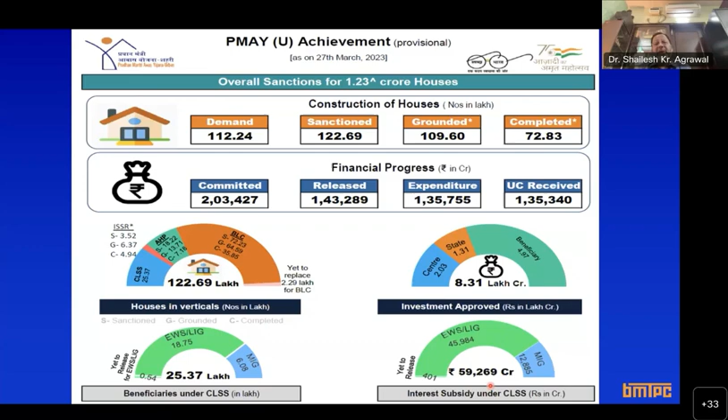Just to give you figures of Pradhan Mantri Awas Yojana, the validated demand given by the states in 2015 was 1.12 crore houses. That was the urban housing shortage in the EWS sector, economically weaker section, or poorest of the poor. Right now we have sanctioned 1.23 crore houses, out of which 72.83 lakh houses have already been completed and handed over to beneficiaries, and around 1 crore houses have been grounded. Out of these, 16 lakh houses are being constructed with these new technologies. Sometimes questions are asked, are we reducing the use of cement or steel? We are using cement and steel, but we are using them efficiently.

When we talk about construction system, a natural question comes to everybody's mind: what is a construction system? There are two things, dear friends. One is material: cement, concrete, or building elements like brick, blocks, or a panel. But a construction system is the system which helps in transferring the load of the building to the foundation. The structural system is called the construction system. We are trying to replace the conventional construction system with an innovative construction system.

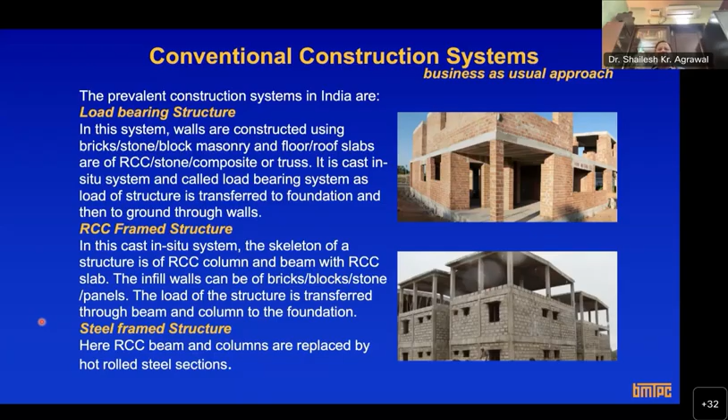There are a number of technology providers, contractors, agencies who are into this. And also the good news is that Government of India, for the first time, proactively, is not only promoting but implementing these innovative systems in their own projects, including CPWD. So I think through this slide I have made it clear that we are trying to replace existing cast in situ frame construction by innovative construction systems, which is basically a load carrying structural system of your building.

Also, most of you know about this, but let me tell you that there is too much dependency on cement, aggregate, and water. All of you know water is scarce. Then fine aggregate, sand. Some states have already banned the use of sand. Tamil Nadu, if you go, you don't get sand there. Instead of that, you have to use quarry dust and all. And similarly, water. So we don't say don't use cement, aggregate, steel, but use them efficiently.

And all of us know that when we do cast in situ construction, how the water is being used, how aggregates, how the mix is being done. So there might be wastage of these materials. So once we manufacture the material components in the factory, you can optimally use these materials. So I don't say that don't use these materials.

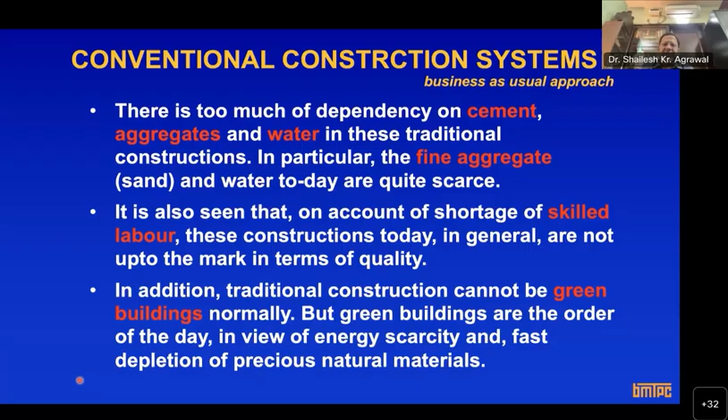some of these things. And as I told you earlier, speed is one of the most important criteria if we want our country to be a developed country by 2047. We want to build a new young India, and with the kind of urbanization, we have to introduce these fast track construction systems in the construction industry. Also, as I already covered, primarily these systems which I'm talking about are fast track construction systems.

All of you know that most of the projects, sometimes for want of material, because of scarcity of labor, because of inclement weather, struggle with time overrun and cost overrun. Once the project is delayed, the cost is also escalated. So these cast in situ construction systems are slow track construction systems, and we need to introduce this fast track construction system.

Also, this is just a slide on green. Every time we are talking about green building, sustainability, and all. So I thought I will put a slide for all of you to make you understand what is green, and why, how do we incorporate green aspects when we talk about new technologies or when we talk about a project. So first and foremost thing is resource efficiency.

In no way do we say don't use cement, steel, all these materials, but use them efficiently. And how can you use them efficiently? Once you produce or manufacture these components under controlled conditions. So resource efficiency, or make use of some waste material like fly ash, slag. In the projects which I will be discussing with you, when we are using precast concrete, we are using fly ash, or sometimes GGBS and other supplementary cementitious material, which not only enhance the durability of concrete but enhance the strength and other things also.

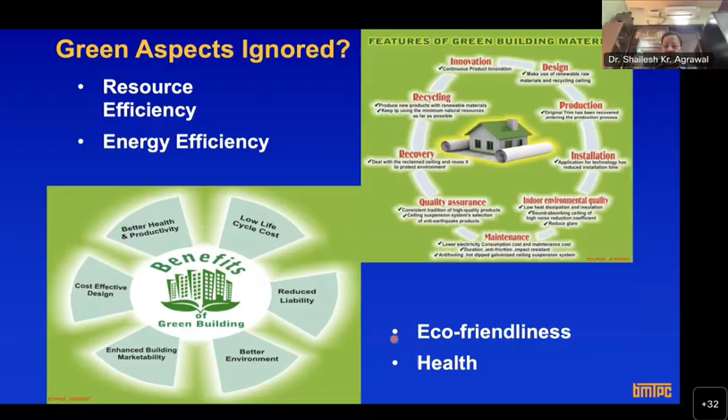This is again a very interesting slide to show you that buildings consume 40% of precious energy sources, 25% of potable water. All of us know that in construction, for curing, we require potable water, or drinking water. So 25% of fresh water is being consumed by buildings during construction, and 40% of natural resources. All of you know cement, steel, all of these are based on natural resources, cement on limestone, steel on iron ore. So buildings consume a major percentage of these precious resources, whether it is energy, water, or natural resources.

And if you look at the bottommost portion, at the same time as they consume so much of precious resources, building activities contribute 50% to air pollution, 42% of greenhouse gas emission, 50% of water pollution, and 48% of solid waste. And all of you know that India is signatory to the Paris Agreement, COP 21, COP 26, and as signatory to these agreements' climate mitigation strategies, India is committed by 2070 to have zero emissions. Why I'm telling you this is because the construction sector is one of the biggest contributors to these greenhouse gas emissions. As you can see here, 42%.

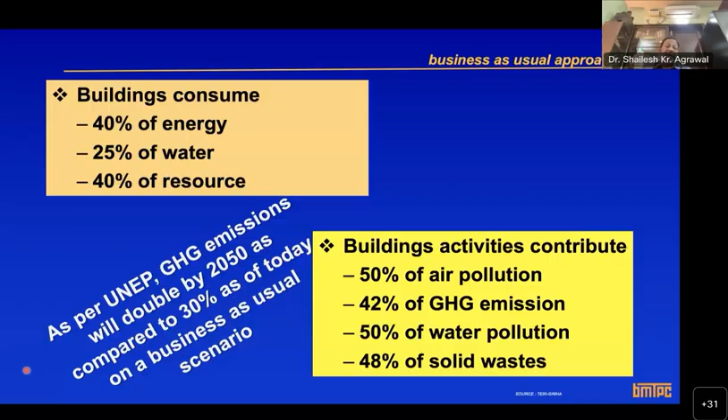There was a report from the UN which says that if we continue with business as usual - meaning if we continue to use load bearing brick construction or cast-in-situ frame construction - our greenhouse gas emissions through the construction sector will get doubled. So we need to reduce that.

So why do we require these innovative, emerging technologies - you can call them new, emerging, innovative, or sustainable technologies? First and foremost is speed. In addition to cost, speed plays a very important role in deciding the construction system, material, and project attributes. Keep in mind the time of completion.

All of us know about the Parliament building - beforehand it was decided it has to be completed within a certain span. Similarly for projects, this is very important if we want resource efficiency and want to save on cost. If you complete the project within a stipulated time, you save on a lot of things, and it has a direct impact on environment, energy, and other factors. So speed is very important.

Quality cannot be compromised, and all of you will agree with me - doing construction at the site versus off-site, there is a whole lot of difference. Once you industrialize or mechanize construction activities, you have better control on quality, you can assure good quality, and you get a good quality product. Quality is again related to greenhouse gas emission, maintenance, cost, and efficiency.

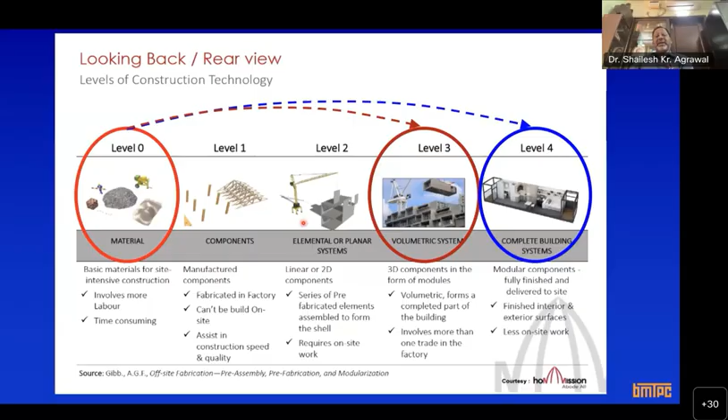Some of you might be knowing, for example, DDA has constructed more than 60,000 houses in Delhi itself with level 2 technologies, where in a casting yard, building components are made. You all know that for bridges, metros, and big infrastructure projects, we use precast technologies, and that precast can be used gainfully in the residential sector as well. A lot of houses are being made with this level 2 and also level 3 and level 4.

There is another very interesting terminology knocking at the Indian construction sector: DFMA. When we talk about construction, what comes to mind? We think of a contractor who will come and construct. We give him material, or ask him to bring the material, and then he does the construction.

Nowadays, agencies are available which are called DFMA agencies, and DFMA stands for Design for Manufacture and Assembly. As per your project requirements and site, these agencies will entirely conceive your project, set up a plant and machinery, manufacture the building components there, assemble your building, and then go away with the plant. They are called specialized DFMA agencies. The entire project, including plant, machinery, and everything, will be conceived by them. In times to come, instead of a contractor, you will look for a DFMA agency if you want to use these innovative technologies.

They will set up a plant near your site, or if your site is near the factory, you can take the material from the factory. Otherwise, at a casting yard, they will set up plant and machinery, and once the project is over, they will take away that plant. So I thought I would introduce you to this term, replacing the word contractor with DFMA, Design for Manufacture and Assembly.

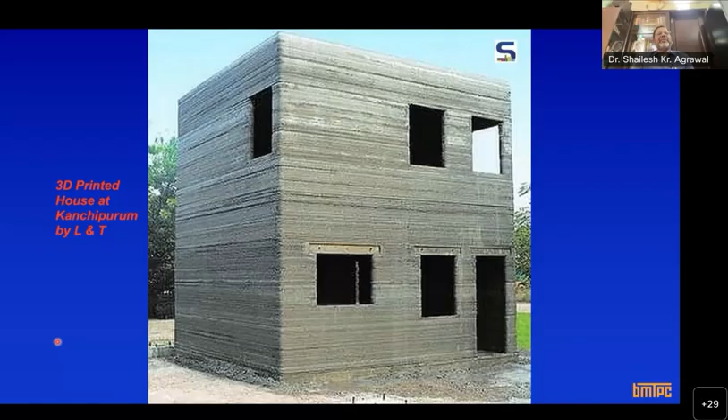So this was the background of the new technologies and the terms associated with them, and what do we require - why do we require these technologies. Now let me briefly introduce these technologies to you. As I told you, all these categories we have categorized like this, so it is not sacrosanct - it is just for better understanding and comprehension. We have given the names, and each category will be explained to you in detail from tomorrow onwards.

But today I will briefly introduce all of them to you. So I've given a name: engineered formwork system - this will be explained to you day after. Then stay-in-place formwork system, sandwich panel systems, cold form or light gauge steel structural system, then steel structural system, and then precast concrete construction system. The precast concrete construction system category has been divided into two: one is 3D volumetric, where the entire module is made, as I explained, or otherwise you make 2D or linear elements and then assemble them at site. So each day, one category will be explained to you.

Before that, let me tell you that whenever we deliver these lectures, a lot of questions are asked: Sir, are we compromising on quality? What about time? What about cost of construction? So let me tell you, for any new technologies we have in fact created a technical framework to evaluate these new technologies as compared to conventional ones. At no point of time are these innovative technologies inferior to conventional as far as quality, time and cost are concerned.

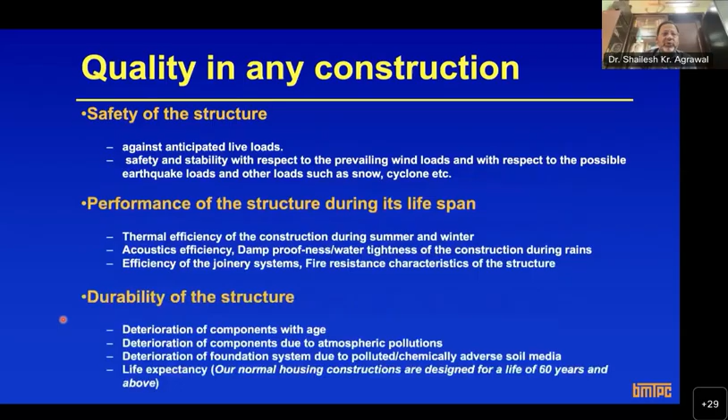Then, traditional construction, as I told you, one is quality, then another is time. When we talk about time or speed, traditional construction is a slow track construction and not amenable for mass housing projects. Because of undue time taken, most of the projects are caught with time overrun and cost overrun. And once your project is into time and cost overrun, a lot of overheads are added, and there is a whole lot of wastage, not only in terms of human resources, but in terms of material as well. So speed of construction is the need of the hour.

Also, it has become essential to go in for faster construction in order to meet the heavy demand and to cut wastages and overheads. So you all agree with me, speed is one of the important criteria to decide the technology to be used. And this is just a slide to show you that the most common question which comes to our minds is, what is the cost? The cost can also be reduced considerably once the technology is mainstream. You can see these economies of scale. Economies of scale play an important role while deciding the costs.

Let me explain economies of scale, because most of these technologies are based on factory setup. Let me give you an example: suppose you set up a plant for manufacturing one shirt or 100 shirts. If you produce one shirt or 100 shirts, the factory setup is the same. So if you make 100 shirts, the cost will be equally divided into 100, otherwise it is loaded on one shirt. That is called economies of scale. Similarly, if your project size is bigger, then the cost will be lesser than the conventional cost of construction.

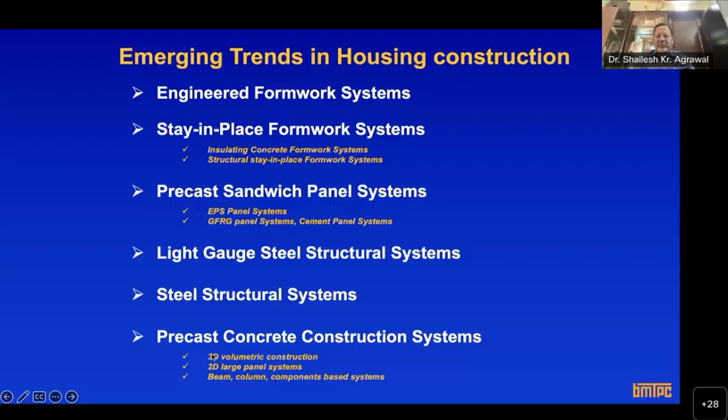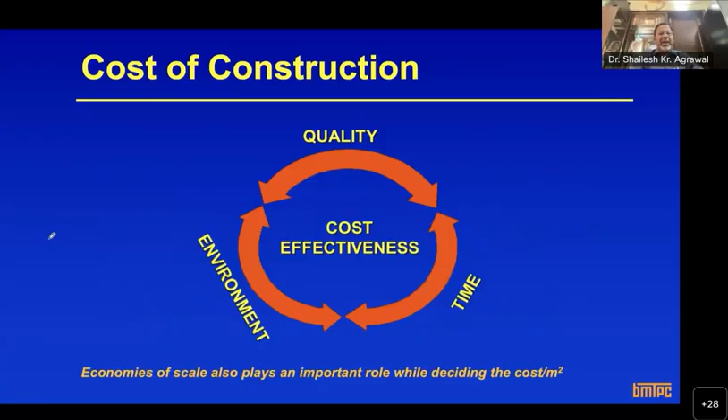And those 54 technologies which we have shortlisted through Global Housing Technology Challenge are also categorized into these 6 broad categories. So steel and this we have clubbed together, and this we have done in 2 categories. I will just explain these one by one through pictures, and anyway from tomorrow onwards you will have a detailed 3-hour lecture on each of these categories. And the blue book which I was talking about is also written in such a fashion that each category is explained in one chapter.

So let's first talk about formwork systems, and we have given it a name, engineered formwork system. All of you being civil engineers, professionals, architects, know about formwork, so there is no need for me to explain what formwork is. Formwork is a temporary or permanent mold which can be of timber, steel, plywood, or wooden plank.

So a whole lot of formwork systems are being used in the country, and this is the conventional or traditional formwork. Nowadays, this formwork can be replaced by aluminum. You might have heard of aluminum formwork system, or a formwork which is made under controlled conditions in the factory. There are manufacturing plants where you make customized, tailor-made formwork suiting your project requirement. So that is called engineered formwork system.

Then we have another 2 kinds of formwork system which I will explain when we talk about that category. So the first category is engineered formwork system, and most of you know this system by Mivan. Mivan is the technology, or alu form or aluminum formwork. And through this picture I am trying to explain what this is.

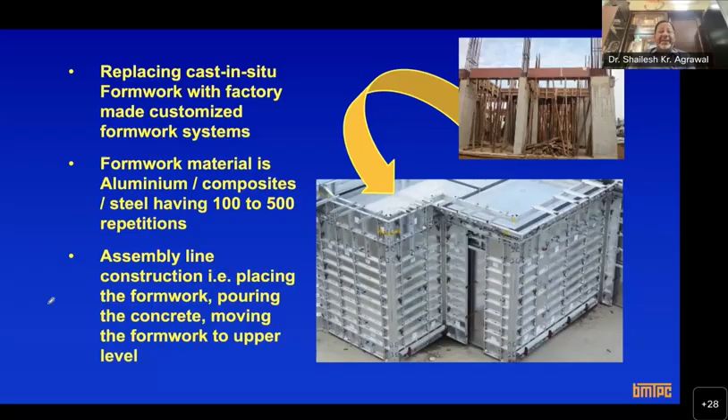Okay, and again, let me show you a few more slides. Again, this is a slide from one of the PMAY sites, as you can see. So what you see here, for the entire layout, first reinforcement is laid, and then the entire formwork is laid. And once the formwork is laid, then you do the concreting, and once you do the concrete, then you can take it to the next floor. So staircase, the sunshades, everything is cast together. So it's a pakka, pure monolithic construction.

Okay, and as you can see here, the conventional mode of construction is RCC frame construction with infill walls. So you make beam, column, and then infill walls. But here, all walls, floors, slabs, stairs together with door, window openings are cast in situ monolithically using specifically custom designed modular formwork, which is normally made of aluminum. And most important thing is appropriate grade of concrete.

Self compacting concrete is being used. I'm not going into detail because there will be 2 lectures on this technology. So you have to use appropriate grade of concrete which gains early strength. It should be self compacting concrete as per design, and it ensures assembly line production. And remember, another thing is this is suited for mass housing.

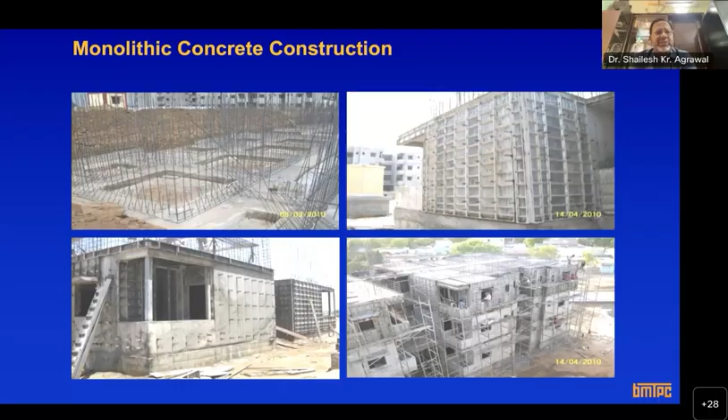You can see this is again a finished mass housing project under PMAY using this. And as I told you, several thousands of houses are being constructed across the country using these technologies, and there are many advantages. There are a number of variants of this technology. This is called tunnel form, and again this will be explained tomorrow. In aluminum formwork we make the formwork for the entire dwelling unit, all the 4 walls. Here only 2 longer walls are cast, so it creates a tunnel kind of thing.

We used this technology in one of our lighthouse projects in Rajkot, which I will be showing you, and that project was completed in record time. In Rajkot we used tunnel form, and the building is G plus 13, a 14-story building, and each floor had 8 dwelling units. The entire skeleton, tunnel form along with slab, was cast in 45 days. We did that in Pradhan Mantri Awas Yojana under the Lighthouse project, and the project has already been handed over to the beneficiaries.

So tunnel form is a mechanized system for cellular structure. It is based on 2 inverted L forms. It creates a tunnel with slab, and for the remaining outer walls you can have infill walls or a sandwich panel kind of system. Here wall and slabs are cast in the form of a tunnel, leaving 2 sides open, whereas in monolithic concrete construction with aluminum formwork, the entire room is cast in a single pour. I hope you understood this. So this is faster, and a lot of people have used this technology.

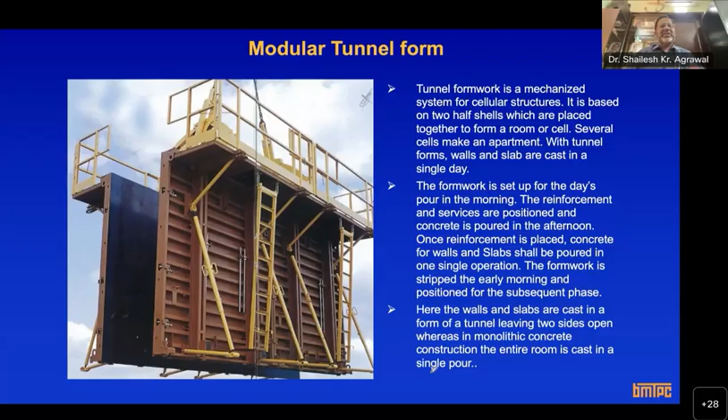Okay, so this is the first formwork system. So here, what you see, this is a typical formwork system which is customized, made in the factory. And once the casting is done, you remove this formwork and give it back.

There is another kind of formwork which is not removed, but which stays with the structure. Okay, and because it stays with the structure, that is why it is called stay in place formwork system or lost formwork. Some of you might be knowing lost formwork system, so this is called stay in place. I have given it the name stay in place. It is also known as lost formwork or sacrificial formwork system.

And this formwork system again is of two types. One is insulated concrete formwork. If the formwork acts as an insulation, then it is called insulated formwork system. If it acts as a part of structure, as a part of reinforcement, then it is called a structural stay in place formwork system. Okay, and I will show you through pictures. I'll try to explain you through pictures.

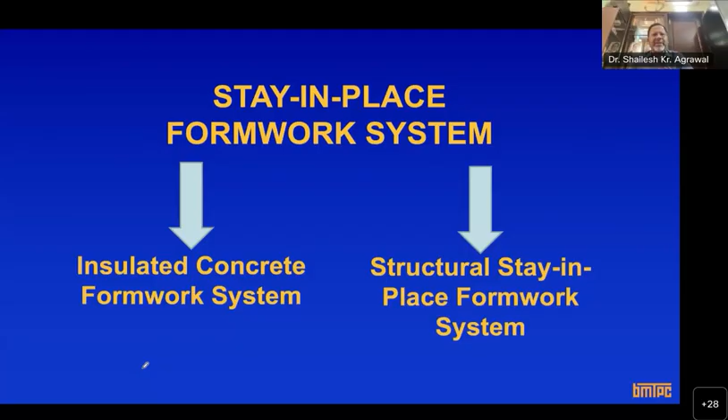Okay, so let me just explain you. So there are two types. First formwork system was engineered formwork system, aluminum formwork. This is stay in place or lost formwork system. So if it acts as an insulation, then it is called ICF, insulated concrete form. So this is like this. So here, all of you know, this is a typical framed and infill wall construction. How about replacing these walls by this kind of formwork?

So this whiter element which you see is expanded polystyrene. Expanded polystyrene, if you are not able to understand, is nothing but a treated thermocol of higher density. The density of thermocol is 1 to 5 kg per meter cube, but this has density more than 15 kg per meter cube. Okay, and its industry name is expanded polystyrene. Okay, so this is this formwork.

So you get these kind of blocks made in the factory, and then two men can insert this and create an entire wall, and then, depending upon your project size, depending upon the design, you can insert the reinforcement and then do the shotcreting. You can fill the cavity with concrete or with lightweight concrete, or, depending upon your structural requirement, keep it without any concrete, and then do the shotcreting from both the sides.

Okay, so this acts first as a formwork system, and then it stays with the structure, and later, because it is expanded polystyrene, it acts as an insulation, and that is why it is called insulated concrete formwork system. So we are replacing cast in situ formwork by this factory made expanded polystyrene formwork system, and this is called sacrificial formwork or lost formwork. Means formwork is left in the structural system to later act as an insulation layer. So there are several companies in our country who are into this kind of formwork system. You can see any joint.

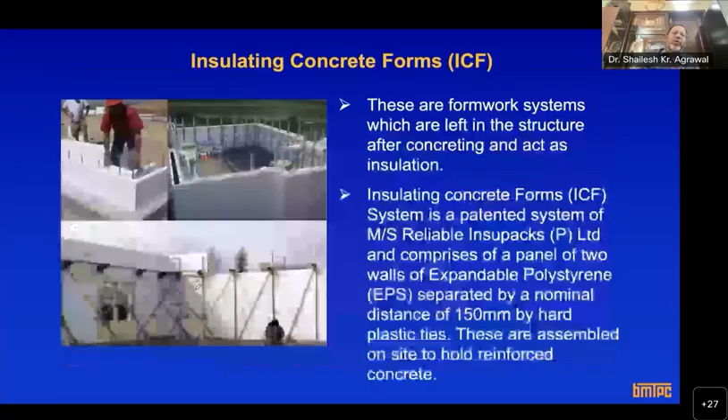As you can see, as per your project requirement, all these elements - corner element, anything - you can have curvilinear, column, T, C, corner joints. All these are manufactured in the factory, and they are separated through that black thing, which is a plastic tie. Then they are assembled at site and have tongue and groove, slip and lock arrangement. Through tongue and groove you create the entire thing, and then do the concreting from both sides.

This system consists of two layers of modules, that is expanded polystyrene - this white thing - separated by hard ties. These modules are interlocking, as I told you, tongue and groove kind of system. They are interlocking modular units, dry stacked over the already laid plinth, and then filled with cast-in-situ concrete. The units lock together and create a form of structural walls.

They can be used as a slab, even for a staircase slab, even for sunshade - they can be used for any application. Then you do the shotcreting. When cured, the wall supports the structural loads from floors and roofs, and the shuttering, because it stays in the structure, provides thermal insulation. As I told you, you can put reinforcement in between the cavities as per your requirement. So this was about ICF.

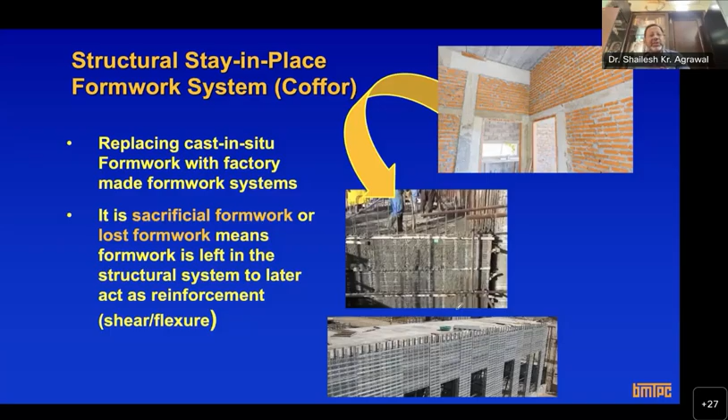You can see here, it is like this. Again, Coffor is the name of the company manufacturing this formwork. It is customized as per your requirement. These Coffor panels are made in the factory and then brought to your site. This formwork system can be used as a load bearing system, so there is no need to have beam columns - you can just erect these panels, which are galvanized. I will show you.

So these are galvanized plain steel sheets with a mesh, a rib lath, reinforced by C profile GP sheets as vertical stiffener. I'll show you another slide. Then these grids are further connected by MS rebars.

So this is a panel which is made in the factory, and then over a plinth you put this and then do the concreting. Here you require a sticky, less flowable concrete, and then you do the concreting and then the plaster. So this first acts as a formwork, and then later it acts as structural steel.

After the erection of formwork panels in alignments, corners, edges for doors and windows, rebar positioning is placed, then concrete of required grade is poured, and once the concreting is done, the walls can be finished with plaster.

So this is simple, and again these walls can be thinner because you are using this formwork, and this is a galvanized sheet. So it's nothing but galvanized plain sheets. This panel is made, and this technology has been included.

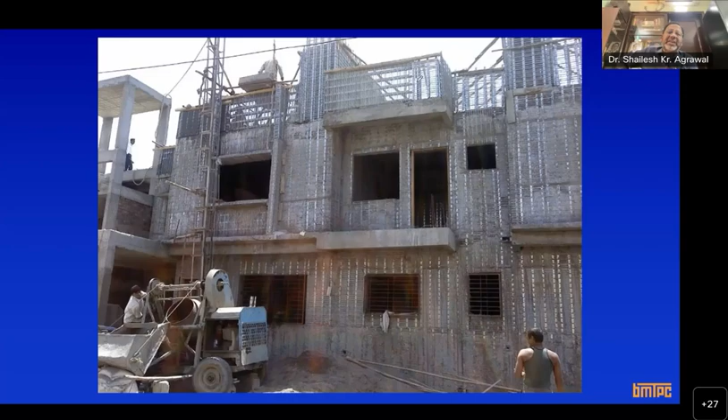As per your requirement, you can have as many stories as you want. If you want more stories, you can put the reinforcement, you can increase the thickness of these panels, and these panels are galvanized panels, erected like this. Panels are brought from the factory, and then you do the concreting.

And there are other agencies, as I told you, for lost formwork systems, there are other formwork systems available. Lost formwork, you can see here, what we have is fiber cement boards. There will be a detailed lecture on the sandwich panel system, but I just wanted to show you, introduce you to this technology.

So fiber cement board on both sides, and they are connected together by these stiffeners, called high impact molded inserts, or spacers. Through these spacers they are connected together.

You can have this fiber cement board in 6mm, 8mm or 10mm thickness, and then they are just dry stacked at the side, coming in suitable width and height, and through tongue and groove connections they are erected at the side. These panels are erected in situ to produce straight-to-finish panels, so you can create a monolithic structure, and the cavity inside can be filled with suitable grade of concrete depending upon the application.

If you are using it for non-structural application, you can fill it with lightweight concrete, or leave it as it is. Otherwise, if you want to use it as a load bearing panel, you can fill it with concrete. So the basic premise here is that you have these skins or sheathing - outer skins of fiber cement board, or calcium silicate board, or anything - separated by plastic inserts in between.

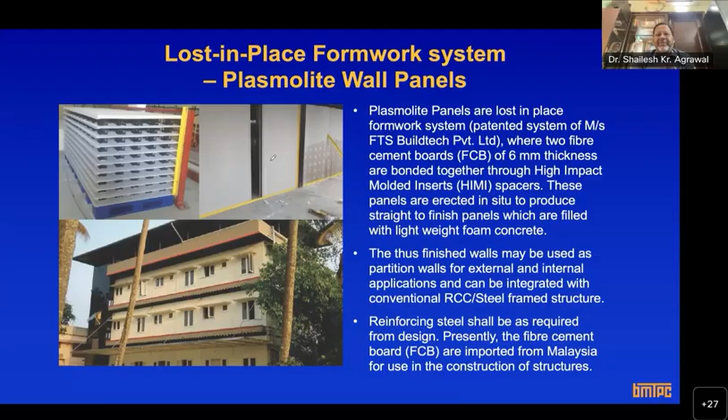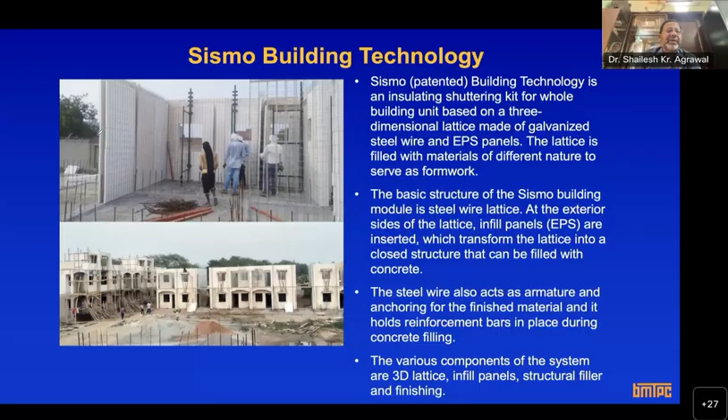Again, the same thing, already explained. This is EPS, expanded polystyrene - the entire panel which is made in the factory. We have used this technology in one of our demonstration housing projects in Lucknow - expanded polystyrene panel with welded wire mesh. I think another slide will show you this.

There is another very interesting technology called stay-in-place PVC wall forms. There will be a detailed lecture on this. This is a wall form which is pre-finished - meaning you can just buy this wall from the factory and erect it. Here the outer sheathing, these outer layers, are of PVC.

This PVC can have different color options - it can be white, it can be gray. You give the order and they will make it in that color, and there is a cavity in between. If you want to use it for load bearing application, fill it with concrete and reinforcement. Otherwise, for partition walls or infill walls, you can use it as it is. This is a pre-finished wall, and this is brand new technology which we are using in one of the lighthouse projects in Lucknow.

That is why it is called PVC wall form. As I told you, these are branded names given by companies. There are two companies in India making these PVC wall forms. PVC, as all of us know, is polyvinyl chloride. So the finish is PVC, and in between there is a cavity, as you can see.

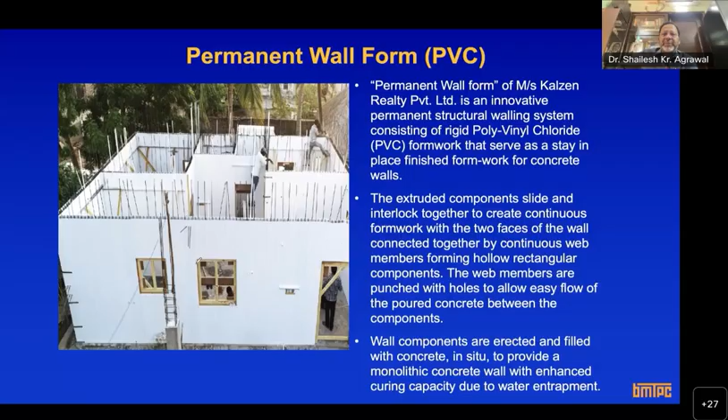A specific component for corners is manufactured in the factory. So as per your requirement, these corner elements and T elements are made, and then erected on the already laid plinth. In between you can insert reinforcement, because it has cavities from both sides - vertical as well as horizontal. So you can put horizontal as well as vertical reinforcement, and once the walls are erected, they are filled with concrete in situ to provide a monolithic concrete wall. There is another technology.

Again, there will be a lecture, so I'm skipping this GFRG, glass fiber reinforced gypsum wall technology. Again, this is one of the indigenous technologies. This technology came from Australia earlier, but then IIT Madras along with BMTPC did a lot of research on this, and this is based on a waste material which is phosphogypsum. So phosphogypsum is a byproduct of a fertilizer plant, and from that these panels are being made, and these are called GFRG, or glass fiber reinforced gypsum walls.

So tomorrow the first lecture will be on this technology by Professor Meher Prasad. So I'm not going into details of this. Again, this is a wall panel made from a waste material which is phosphogypsum, and it can be used as a slab, as a load bearing wall panel. Okay, you can see this, again he will show you.

So you can see, this panel comes like this with the cavities. You can fill these cavities, alternate cavities as per your design with the reinforcement and concrete. You can use it for laying the slab as well. So every third cavity is cut, and you can put a reinforcement and cast a beam there. Okay, this I'm not explaining.

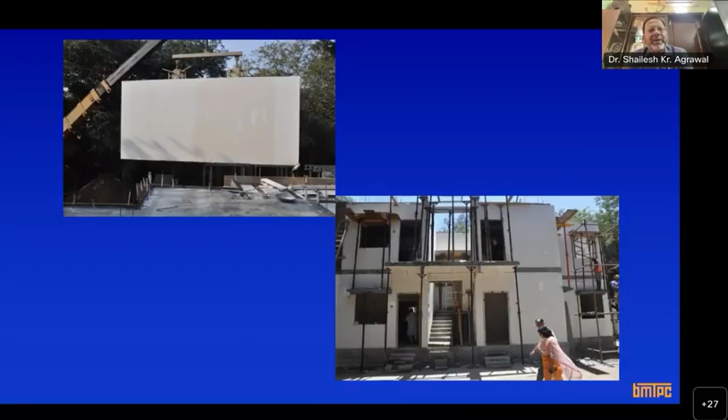So this is the panel you can see. So this panel comes of this form. So for the entire room, okay, this comes, and this is 3 meter wide. It's lightweight because it's hollow, and then it is inserted on an already laid plinth. These are the pictures from a guest house which was constructed in IIT Chennai. Okay, so I'm not going into detail of this GFRG because this will be explained to you tomorrow.

Then let's move to the next category. So far I have explained you two categories. One was engineered formwork or shear wall construction on aluminum formwork. Then another category I explained you, which was stay in place formwork, where formwork is not removed, but it is left in the structure to be part of structure. So if it is part of structure, either it acts as an insulation, or it acts as a part of structure. If it acts as a part of structure, then it is structural stay in place formwork system. If it acts as an insulation, then it's called insulated concrete formwork system.

Now let's move to another very exciting category, which is dry wall construction, and it is known as prefabricated sandwich panel system. Okay, so again, sandwich panel system. Why is it called sandwich panel system? Because there is a softer core which is sandwiched between two outer layers. Those two outer layers can be fiber cement board, calcium silicate boards, MgO board. It can be AAC panel. Okay, so Aerocon panel you might be knowing. So you can have that kind of panel.

So there is a softer inner core, and then you have wythes or sheathing, or you can call it skin. So outer skin 6 mm, 9 mm fiber cement board. That is why it is called sandwich panel system. So a softer core is sandwiched between two skins or two sheathings. That is why it is called sandwich panel.

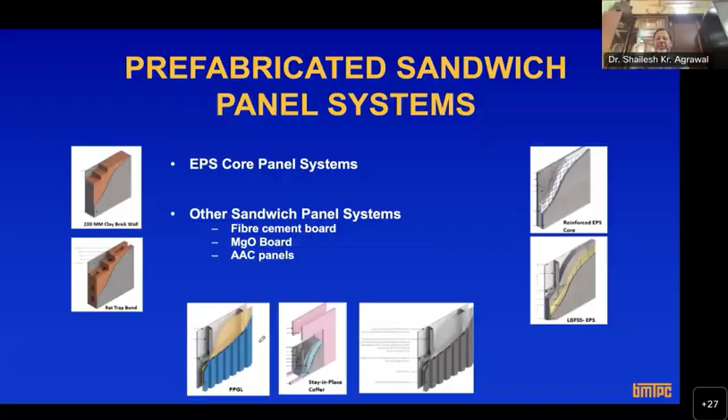So instead of PUF, you have expanded polystyrene, and instead of these profile sheets, you can have fiber cement board, calcium silicate board, AAC panel, or anything else. Or otherwise, you can have an EPS panel, and on both sides you can do the shotcreting. So in general, it is called sandwich panel system. Okay, and I will just show you through pictures. You can see here. So replacing brick and mortar walls with these dry customized walls made in the factory.

So this entire wall with cuttings, you can create these openings at the site, or they can be customized and cut at the site. So instead of brick, you can have this kind of panel. And as I told you, these panels come in a variety of ways: EPS panels or other kinds of sandwich panel system. And there are a number of companies.

Everest is making it. Then Hyderabad Industries. There are a number of companies who are making these panels, and all these panels come in a variety of ways, and they can be single layered or double layered. I will show you pictures. Okay, so first is EPS core panel, which is also very popular. As I told you, EPS is nothing but treated thermocol of higher density, and this is the panel.

You can see this. So this is called EPS core panel system. Again, a detailed SOR of this has already been issued by CPWD. So what you see here, this is the core. So this is a softer core which is of EPS. Then you have welded wire mesh on both sides, and these two welded wire meshes are connected together through stiffeners.

So these two welded wire meshes create a space truss like thing, which helps in load transfer, or which helps in bearing the load of the structure. So this can be used as a load bearing wall panel, and since it is of EPS, it is called EPS core panel system. So core is of EPS, both sides it is galvanized welded wire mesh, which is interconnected through stiffeners, and then you can do the shotcreting from both the sides.

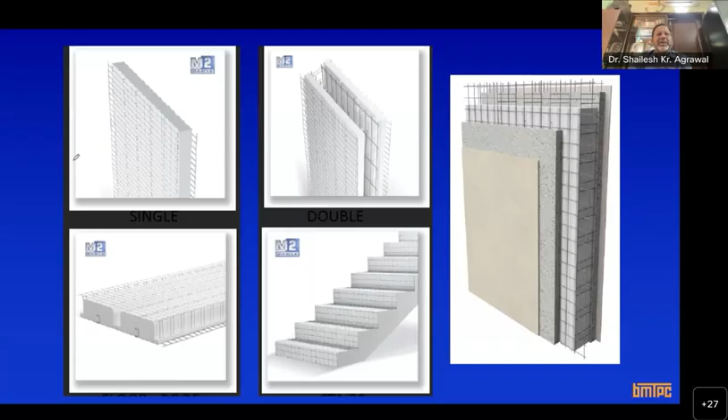We have used this in several demonstration housing projects. Right now, we are doing a project in Jammu where we are making 40 dwelling units using this EPS core panel system. There will be a detailed lecture on this technology as well for all of you. So I think you understood this EPS core panel system, and these are customized, branded technologies. So there are a number of companies, and they give them their own names.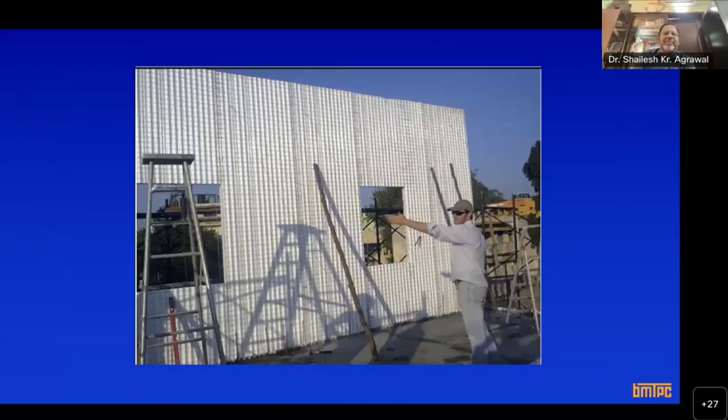So there is a company M2 Emmedue which calls it Advanced Building System Panel System. So you can see, on an already laid plinth, you have double bars, and then you erect this, and then you cut the opening, you can put the services and all those things here. You can see this is that galvanized welded wire mesh I was talking about, and here is the plinth. Then you leave these double bars, and then you put a C channel, and over that you erect these core panel systems.

And then you can have this kind of shotcreting, and then you can do the plaster. You can see this is being used here as a floor element.

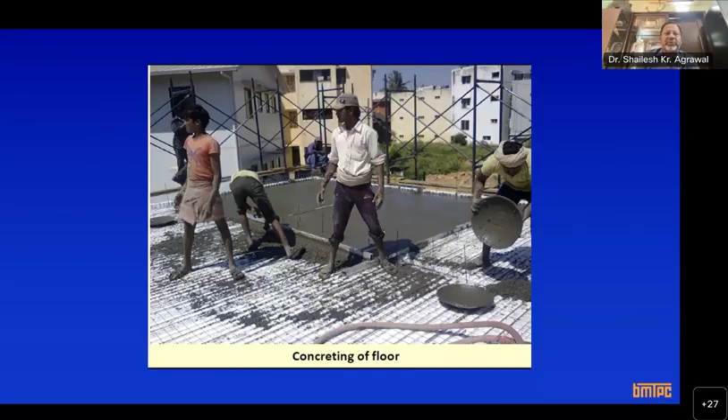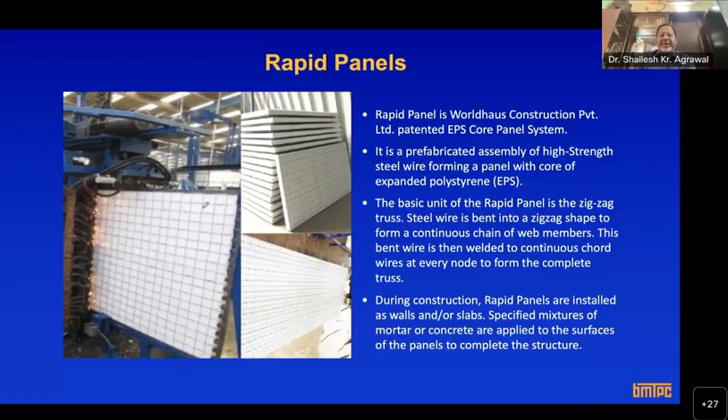There is another company called Worldhaus, which is making these panels with the name Rapid Panels. Okay, so again you can see this is welded wire mesh, two welded wire meshes interconnected through stiffeners, and in between you have a core, that is an expanded polystyrene core. Okay, and as per the project size, these panels are customized and made.

Again, this technology has already been certified by us. It has already been included by CPWD to be used as wall panel, load-bearing or non-load-bearing, and as a slab. As you can see, panels are finished on site by spraying concrete to realize the different structural elements: vertical structural walls, horizontal structural elements, slab floors, or cladding elements. Even sunshades can be made with this. And if you're really interested, you can visit our Jammu project. We are doing a demonstration housing project there.

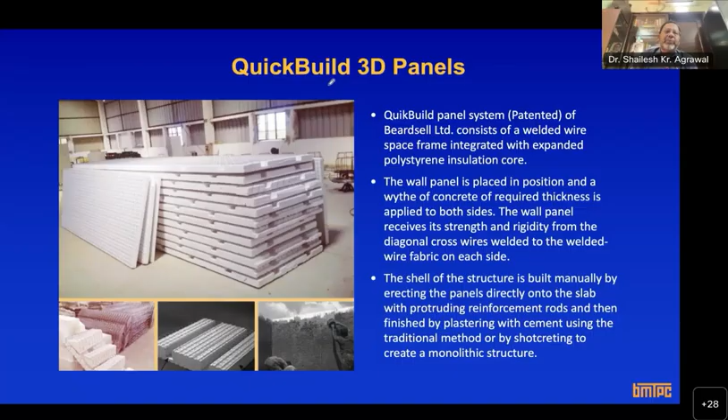Then there is a well-known company, Beardsell. In fact, we are using these Beardsell panels in that Jammu project. It comes with the name Quick Build 3D panels. Okay, then there is Schnell. You might have heard of Schnell India. Schnell is an Italian company which has a patent on this technology, and they normally supply equipment for setting up a manufacturing plant for this EPS panel system. They also have a panel with the name Concrete Wall. So the idea here is just to tell you that there are umpteen companies in India manufacturing these EPS core panel systems.

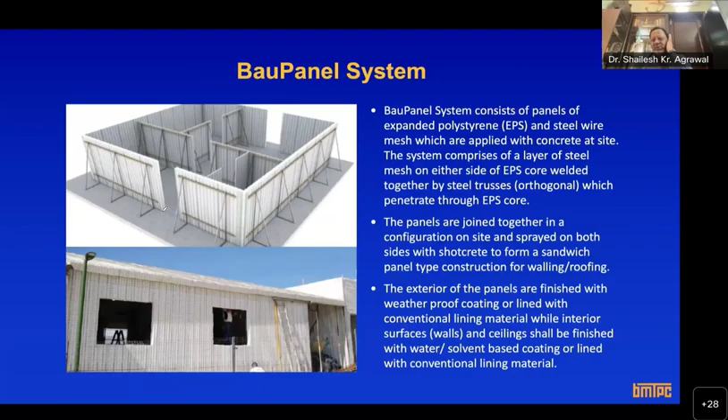Okay, BauPanel, another company from Switzerland, and they all have a setup here in our country, and most of these technologies I'm talking about have already been certified, whether it is M2 or Rapid Panel, Jindal, Beardsell, Concrete Wall of Schnell India, or BauPanel. All of these have been certified by BMTPC under the performance appraisal service. So that was the EPS core panel system.

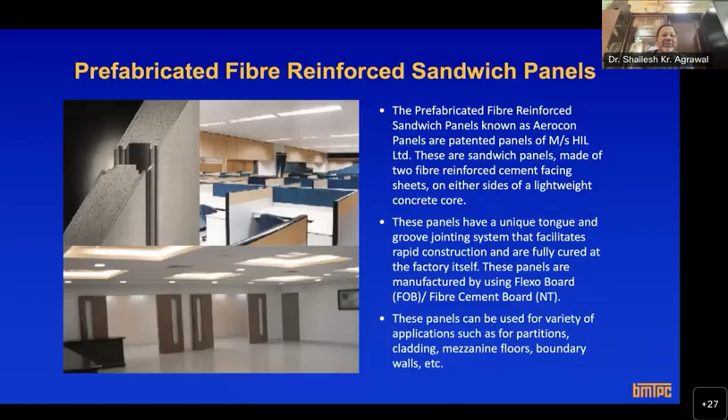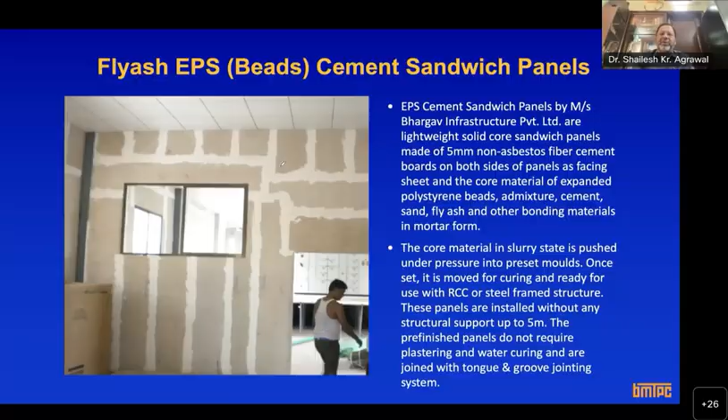So then again, there is another panel. There are two companies who are making this kind of panel. One is Rising Japan. There is another company from Gujarat, Bhargav Infrastructure, which is making this EPS cement sandwich panel system. So EPS cement sandwich panel system means fiber cement board or calcium silicate board on both the sides, and in between you have the EPS aerated concrete, which is made of expanded polystyrene beads, cement, sand, and fly ash.

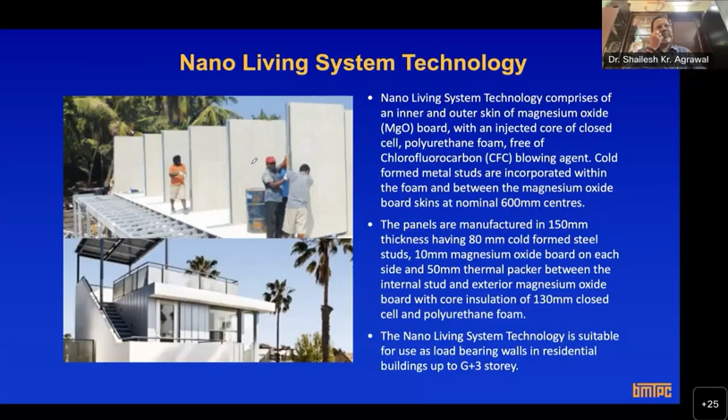Again, the technology is recommended only for 4-story, G plus 3. If you want to use it as a load bearing panel, we have recommended this only up to 4-story structure. So this was the precast sandwich panel system, and as I told you, there will be a specific lecture from a scientist from CBRI who will be discussing in detail about these sandwich panel systems.

Now let's move to the fourth category, which is steel structural system. Dear friends, all of you know that steel is a versatile material and a better material than concrete when it comes to earthquake resistance and making high-rise structures. And we are dedicating 2 sessions.

One entire session on light gauge steel structural system will be taken by a very renowned professor from IIT Hyderabad, who will be talking about light gauge steel structural systems, their equipment, how to design them, how to construct buildings using them, and what kind of infill materials you can use. And there will be 2 lectures by IIT Kharagpur professors, who are basically architects, who will be talking on hot rolled steel structural systems.

Nowadays, steel structural systems have become very popular because the technology has changed. Nowadays we have TMT bars, steel technology has changed, and now we can make built up sections. Remember, earlier we used to have hot rolled steel sections, I girders, channel sections, angle sections. Nowadays we can have hollow built up rectangular sections.

So those hollow built up rectangular sections have opened up a lot of flexibility into the structures, and you can use them for making a whole lot of different kinds of structures, and replace RCC beams and columns by these built up sections.

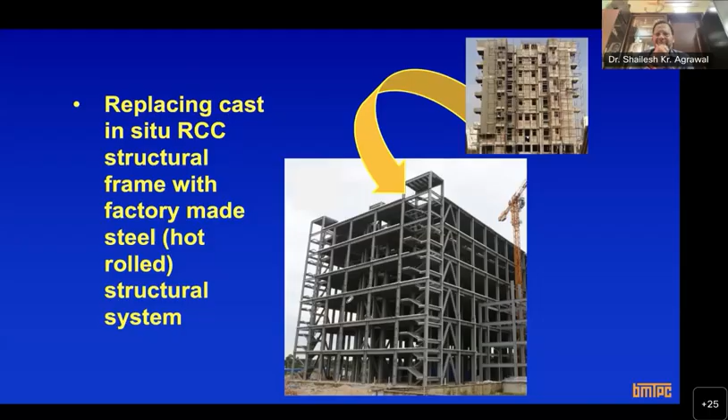So of course there is a whole lot of saving and speed. You can fast track the construction, because instead of making beams and columns and curing, you can just get them manufactured in the factory, put them in place, and then whatever drywall systems I told you about, you can just insert those walls as infill walls here. I think I will show you that as well. So I think you must have got the basic understanding now. There will be a few lectures on this technology as well.

And let me also tell you that whenever we talk about these new technologies, the entire concept is done in a very professional manner. Remember we used to talk about CAD, computer aided design, design and manufacturing and construction. So the entire thing is fed into the computer: your plan, layouts, elevation, the entire design process, and then through your software you get how many components are required and what kind of components are to be fabricated.

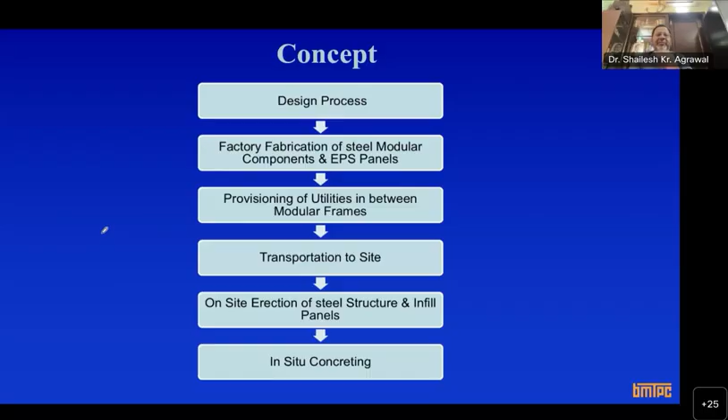So the entire thing is mechanized, automated, and then you fabricate those components in the factory. In the factory itself, you can give the provisions for services and other things, then transport them to the site, and just erect them at the site. So the entire thing is an automated process, right from the concept stage to the construction stage or handing over stage.

You can see this. There is a company called InstaHome. InstaHome means instant homes. So they make the entire thing for you, including finishes and this kind of thing. I'll show you. You can see this. I just wanted to show you this. So, this is what you see.

This is a very interesting 10-story mall, which was constructed in the outskirts of Chandigarh. You all know about Mohali. Mohali is quite famous for a cricket stadium. It's an industrial town in the outskirts of Chandigarh, where this mall was constructed in 48 hours. It was constructed, I think, in 2014, and the entire operation was seen by the then Home Minister.

And the technology was not new. You just can't make it out, but the technology is this. They have used steel beams and columns, and the walls are EPS. You remember I told you about EPS wall panels.

So they have used EPS wall panels here, and they have used steel. By the time you do the foundations, you give the order for beam and column to the steel factory. They will manufacture those beams and columns for you, and then you just bring them to the site with all services, and erect and assemble them, and start using them at the site.

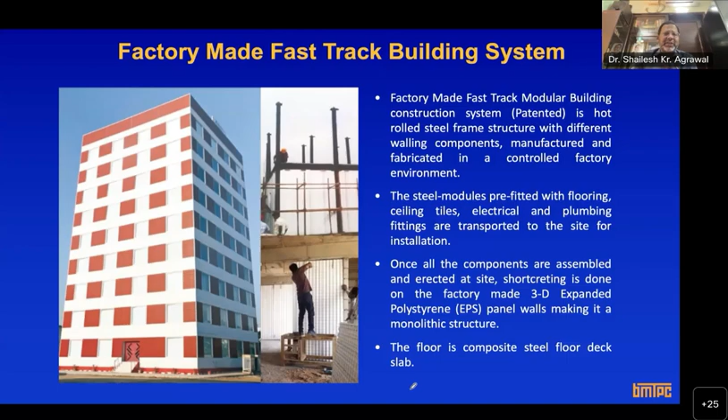Steel behaves quite good in tension as well as compression, so it is quite good for earthquake resistance as well. You can see this for quickly rehabilitating in case of disaster, it can be used for quickly erecting or quickly rehabilitating people.

This is a site near Dehradun. Some officers' mess and other structures for the Ministry of Defense are being made by the same company. So these columns and beams were manufactured in the factory, and then they are putting the EPS. Here the slab is a deck slab, which all of you know - you put a profile sheet, and over this you put a nominal reinforcement, and then you do a screed concrete to create a slab.

In fact, I have used this technology after the Hudhud cyclone. We were asked to give a technology which can quickly rehabilitate the displaced people during the Hudhud cyclone. So this was the technology we gave. These are those examples, you can see these.

This is near Vishakhapatnam, which is a coastal area, so we have given them coating and all. So it's a steel structure with deck sheet, and these are aerocon panels. For infill you can use anything.

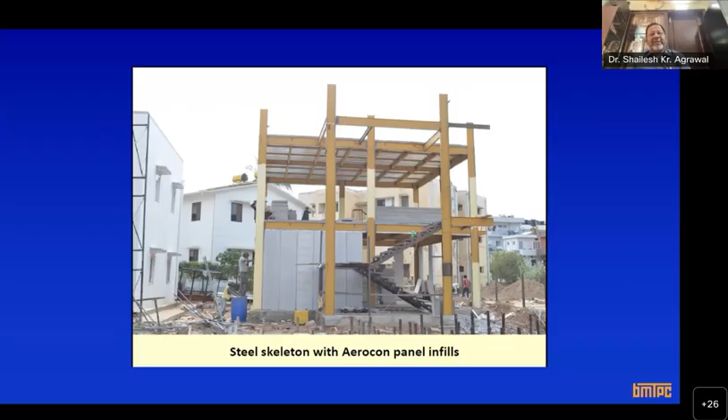So the basic thing is the structural system - the structural system is of steel, the slab is a deck slab, and these walls can be EPS panel, sandwich panel, or puff panel, as per your requirement, as per the utility of your building, and as per the cost available. You can have these infill walls, and this comes out very cheap.

This is for industrial structure - all PUF panel. This is a puff panel where you have this puff, which is a core of polyurethane foam bonded between two PPGI sheets. PPGI sheets are pre-coated GI profile sheets, and in between you have the puff. So mainly for industrial structures, this PUF panel with the steel structural system is being used.

Then there is another, again sandwich panel with puff panel, which can be used. There are a number of companies making it, Hyderabad Industry is one. Let me tell you that during COVID time, most of these panels were used for quickly erecting hospitals and other infrastructure for COVID patients.

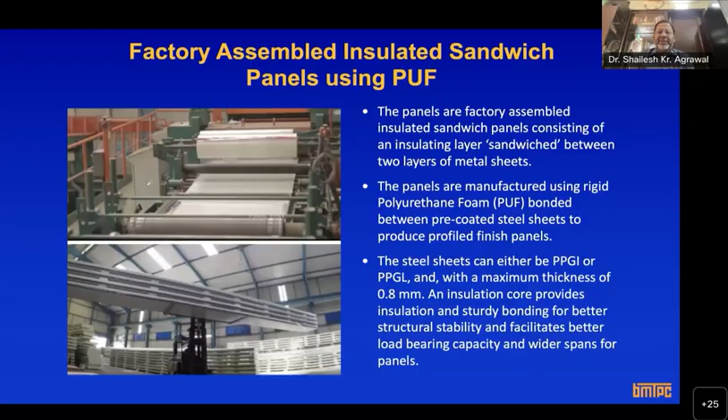Then there is another technology which is light gauge. All of you know steel can be manufactured in two ways - hot rolled steel and cold form steel. Cold form steel is made from galvanized thin steel sheets, put in a press to form different sections to create light gauge steel sections, and these light gauge steel sections can be converted into wall panels and used to make low rise structures up to G+3.

There will be a lecture of 3 hours by a professor from IIT Hyderabad, so I'm not going into detail, I'll just show you a few slides. This is how it is being done - you're replacing, and this is a very popular technology. I will give you an anecdote also on this technology. First let me explain - this RCC frame construction is being replaced by this kind of light gauge structural system.

So they have created an entire township using this light gauge panel. And we have recommended this technology only up to 4 stories. Abroad, in Hong Kong and other places, they are using it for high rise. But looking at our geo hazard profile, we have recommended or certified this technology only for 4 stories.

So the frame is made of cold rolled high strength steel section, and in between this space you can put a fiber cement board or EPS panel, and you can infill it with mineral wool or rock wool. And again, light gauge steel, this has already been included by CPWD. Detailed schedule of rates has also been created for this.

Also for cold form steel, we have a code, long back, IS 800 - all of us know IS 800 is for steel structures. Similarly, IS 801 is the code for cold form steel. It was made long back, and now they are revising it. But cold form steel we didn't use because it was replaced by concrete.

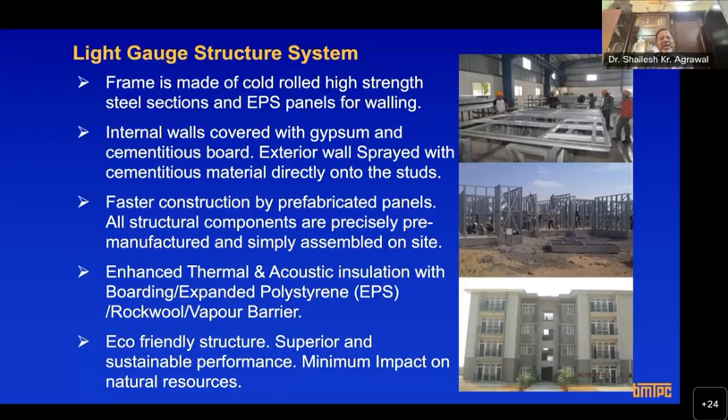So all I wanted to say is that this technology can be used for a variety of applications, and very quickly you can erect this structure without compromising structural and functional performance.

And as I have been telling you, all these technologies are ably supported by computer-aided design software. All sophisticated tools complying to our standards are available. So you can create the entire model - virtual model, 3D model, walk-through model. Everything can be done and suitably designed. And then later it can be given to the fabrication team for fabrication, and then brought to the site for assembly.

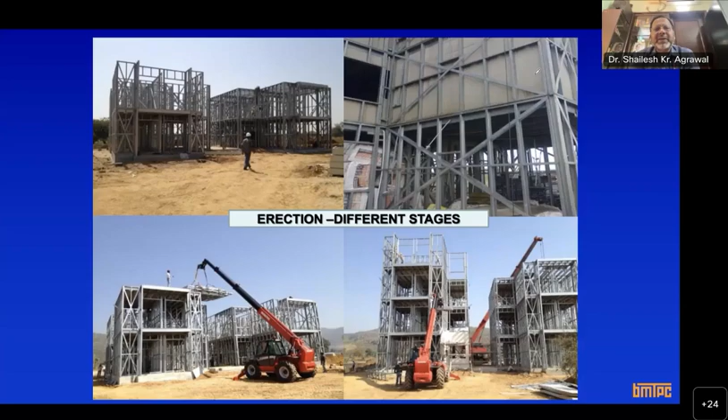So you can see here, this is that light gauge panel I was talking about. They are made in the factory, and on both sides you can see these fiber cement boards, and in between you can put the rock wool or mineral wool with vapor barrier. Or instead of fiber cement board you can put any other board like calcium silicate board, EPS panel, or some agencies are making thin precast concrete panels instead of fiber cement board. So as the company, they can put any kind of sheeting elements.

You can see this - here they are using precast concrete panel. So there are a number of companies, as I was telling you, this is that precast concrete panel. There is a company from Bangalore - they are using light gauge steel frame structure with precast panels, and these precast panels are filled with lightweight concrete.

So in between, you can put rock wool or mineral wool, and if you are not happy with mineral wool or rock wool, you can fill it with lightweight concrete - lightweight concrete you all know. So this was about the steel structural system, and now let's move to the next category, which is the most promising one: precast concrete construction.

Precast concrete construction, again 2 days we will be devoting for this. One day will be on 2D precast, so its entire manufacturing, transportation, design, and joints will be discussed with you in detail.

And the next one day will devote on 3D volumetric construction, where the entire module is made one over the other. We have two very prominent industry experts actually doing this. One has already done the Goa International Airport project, which was recently inaugurated by the Honorable Prime Minister, made with 3D volumetric construction. So we have the CEO of that company delivering a lecture. And another project we are doing in Ranchi with 3D volumetric construction using a company Magicrete of Gujarat, so their CEO will also present on 3D volumetric construction.

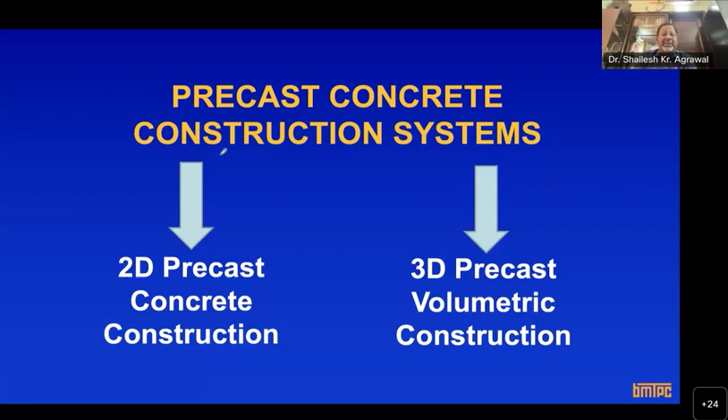Those two lectures are going to be very interesting, so they will explain you in detail. Then we have a scientist from CBRI who will explain the different aspects of 3D volumetric and precast concrete construction. Then we have a professor from IIT Madras who will deliver a lecture on precast concrete construction, its design aspects and other things.

So the basic premise for 2D precast concrete construction is simple, as I explained earlier, that you are replacing beam, column by these kind of components. Any component - it can be beams, columns, wall panels, slab floors, staircase - so replacing your infill walls, beam, column, slab by these precast elements which are customized and made in the factory. These are customized factory-made beams and columns, and then you just assemble them at the site.

And joints - you can ask several questions on joints. There are different kinds of joints. You can have cold joint, wet joint, and these joints are emulative joints, so you can ensure monolithic action between the joints. You can design the joints like that. So in-situ concreting you can do and create a monolithic joint between these precast elements.

Again, these are the elements - they are L&T. They specialize in precast large concrete panel systems. You can see the entire facade, the entire outer wall is precast and made in the casting yard, and just hoisted and placed at the desired location, then connected with other elements. You can see corner joint, L joint, C joint, this kind of joint with openings, without opening, shear walls - everything is done in the casting yard, and then they are installed.

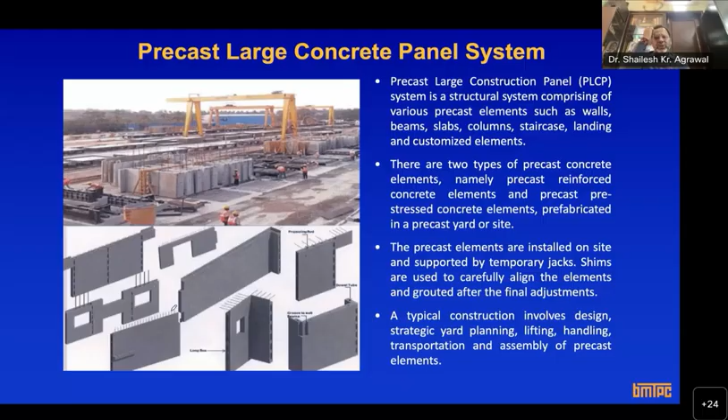Precast elements are installed at the site with temporary jacks and shims, then they are aligned, and then you can do the in-situ concrete at the site. Any element you name - you see staircase. This is the pod element I was talking about, the entire pod element, a toilet block, bath block, or any other, and then just put it in place. This is a solid slab, hollow core slab. You can have parapet, spandrel beam, wall panels - any element you name, you can make and then erect.

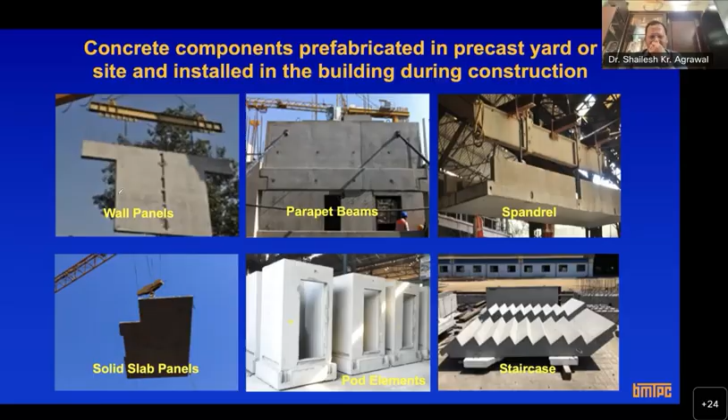All the connection and jointing of various structures are accomplished through in-situ concreting. They call it the 3S system, industrialized 3S system - it's their patented system. They erect beam, column, and partially precast slab, and then do the in-situ concrete, so as to ensure monolithic, continuous, resilient, ductile behavior - monolithic concrete action.

So this is a factory setup, and I will strongly recommend, if you are from Delhi, you should go and visit the casting yard of any precast factory. You go and visit the casting yard. All kinds of sophistication. You will not believe, you don't need to cut the bars and all.

There are machines, automatic machines are available, and you have to just feed in the computer the size of the reinforcement cage, and then you have a reinforcement coil. It will automatically cut the reinforcement and then make the cage for you.

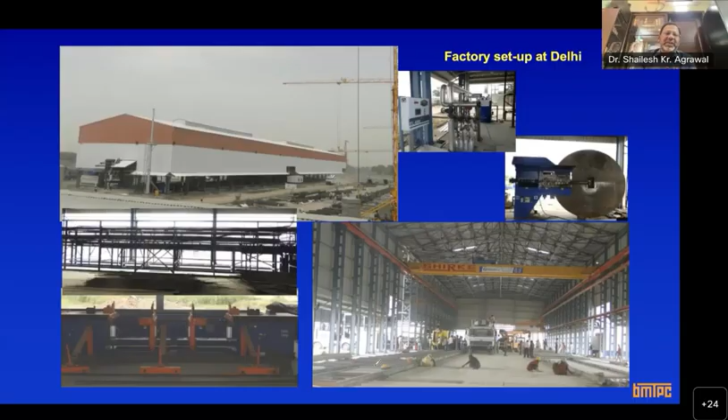Then you have long concrete beds where automated concrete will come, the reinforcement cage will be lowered, then you will cast, and then you will cut those, and you will do the pressurized curing so that they achieve the strength within no time. Within 2 to 3 days the element is ready and then transported to the site. So all kinds of sophistication has gone into concrete construction. This is a typical setup from the factory of BG Shirke.

And as I told you, you can have hollow core panels also. There are a few companies who are making hollow core non-load bearing panels as well. So for infill walls, these panels could be quite good, because being hollow core, they give you better insulation. Then there is another company who is making these hollow core non-load bearing panels. Then another precast concrete company, again Gujarat-based, Urbanac, they are making them.

So most of these precast companies give you a total solution. Normally an EPC contract is given, and they will do the design. As I told you, DFMA. So they will design for you, they will cast the elements for you, erect it for you, and make the building for you, including design and all.

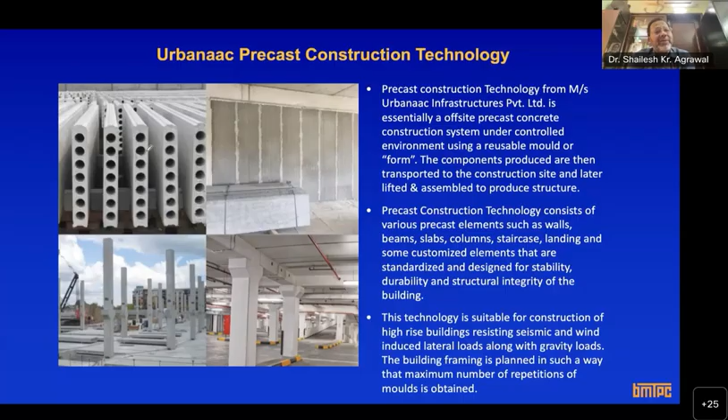So another variant is hollow core, because sometimes if you want to make the entire wall, it may become very heavy. So you can make it hollow. You can pre-stress it as well. You can see this is a pre-stressed hollow core column. So any element you can make like this.

There was another company, a USA-based company, Katerra. They have set up a plant in Krishnagiri, which is on the outskirts of Chennai, on the border of Bangalore and Tamil Nadu. They have a setup where they are making all these kinds of concrete elements. As I told you, this can be of different combinations. You can have hollow core wall panels, hollow core slabs, or a solid wall as per your requirement and design.

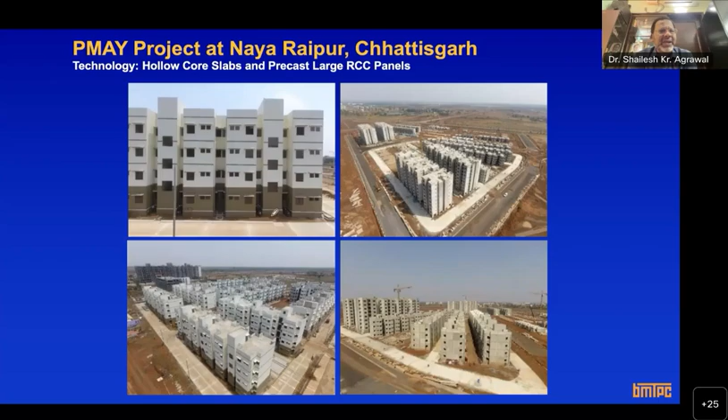So this is the project under Pradhan Mantri Awas Yojana in Naya Raipur, in Chhattisgarh, where we have done a PMAY project, one of the largest projects with precast. We used precast large panels for the walls, and for slabs we used hollow core slabs. A casting yard was set up there, these hollow core slabs and large panels were cast there, and then this building was erected. I think the building has already been inaugurated and put to use.

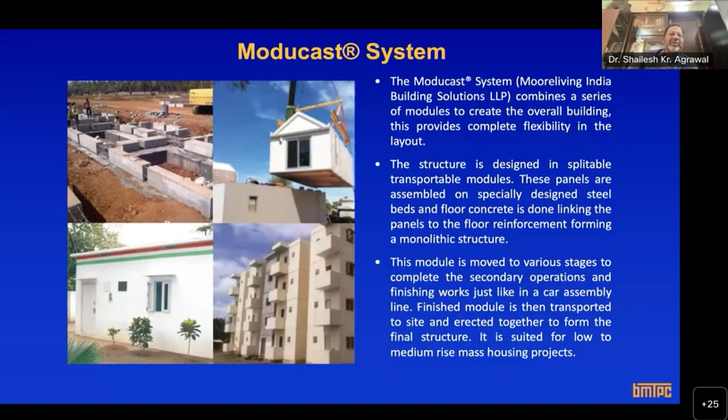Okay, I'm not going into the details because this will be discussed with you. Okay, so again, this is a picture from his presentation only. So you have molds, then in those molds you insert the reinforcement cage, then pour the concrete, and next day you remove this mold, and then remove the entire module, and then the entire module is cured and then put on the trailer, brought to the site, and then put one over the other to create the building.

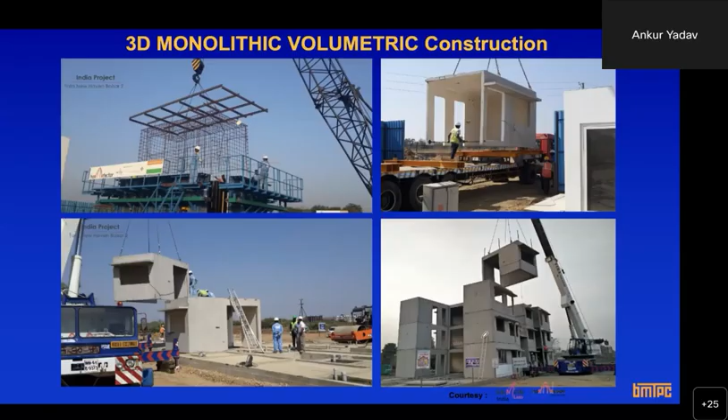Okay, and as I've been telling you, now the last part of my presentation: all these technologies which I talked to you about, we have certified these technologies. And why have we certified? Because all of you know, whenever an innovative technology or innovative material comes to the market, we as engineers and architects are reluctant. Being in government, sometimes we are reluctant for the want of certification and absence of specification standards. So BMTPC has been authorized by the Government of India through Gazette notification to foster innovative products and technologies in the construction sector.

BMTPC is authorized to evaluate, assess, and certify new technologies. So all these technologies which I discussed with you or explained to you have already been certified by BMTPC. There are 42 of them which we have certified. Their certificate, if you want to download, you can go to my website, or on your dashboard we have given a link. So suppose 3D volumetric printing technology you want to see, you just click on that PACS. We call it Performance Appraisal Certification Scheme. In short, it is called PACS. So you can see the certificate.

It's a detailed certificate, and we call this detailed certificate a pre-standard. Okay, so for technologies for which there is no standard, this PACS can be used as a standard, and it gives details of the technology, its quality control measures, its construction manual, its user manual, its design methodology, its engineering and other parameters. So the entire certificate gives a whole lot of information along with the design details and other details. Okay, so if you're interested in any of these technologies, you can go to that PACS on your dashboard, click on any of the technologies and download the certificate.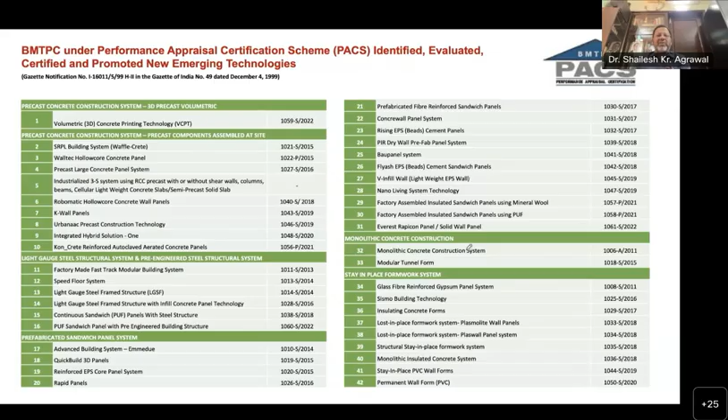Okay, then the last part: all these technologies which I explained to you, it all started with the Ministry of Housing and Urban Affairs. To be specific, on 2nd and 3rd March 2019, we organized the Global Housing Technology Challenge. It was inaugurated by the Honorable Prime Minister, and at that time we threw a challenge to global players across the world: please show us your construction systems which can help build the maximum number of houses in minimum time and minimum cost. So the challenge was a big success.

Around more than 80 companies participated, and 54 new technologies were shortlisted. And for shortlisting these technologies, a high-level expert group was constituted, which we called TEC, Technology Evaluation Committee, which was headed by the DG of CPWD, and we shortlisted these technologies. And the entire details are available on this GHTC website, or on your dashboard. The link is given, and these are those 54.

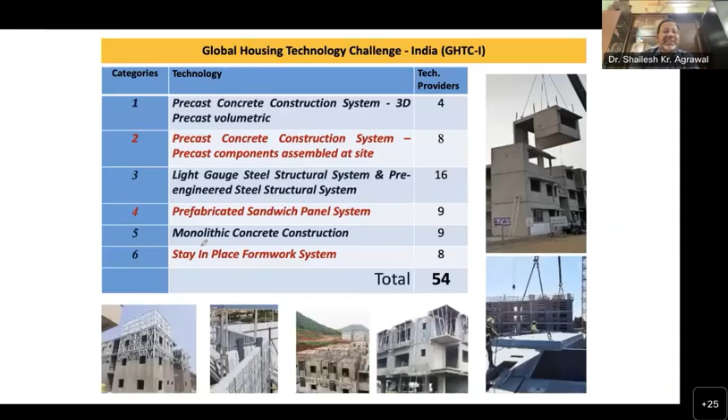Okay. And just to promote these technologies, we are doing 6 lighthouse projects, and each of these projects is using these 6 distinct categories. Like in Indore, we are using sandwich panel system. Rajkot, we are using tunnel form. Chennai, we have used the Shirke technology, precast. Then in Ranchi, we are using 3D volumetric construction. And the agency executing this project will be delivering the lecture on 3D precast.

Then Agartala, we are using light gauge and steel hybrid system. In Lucknow, we are using PVC wall form. And we are calling them lighthouse projects. And remember, I showed you in the beginning one slide where Honorable Prime Minister was launching our course, this NAVARITIH. So this course was launched during the inaugural foundation stone laying ceremony of all these 6 lighthouse projects.

And all of you are being encouraged, and I'll strongly recommend you can go and see these projects. So these projects started in 2021, and despite COVID, we have already finished Chennai and Rajkot project. These 2 projects have already been completed and handed over to the beneficiaries. In fact, these projects were inaugurated by Honorable Prime Minister and handed over to the beneficiaries.

Already beneficiaries are living in these 2 projects, and very soon we'll be completing this Indore and Lucknow and Ranchi project as well. So these are lighthouse projects. Specifically they are called lighthouse means they will guide the construction sector to adopt these technologies for their future projects.

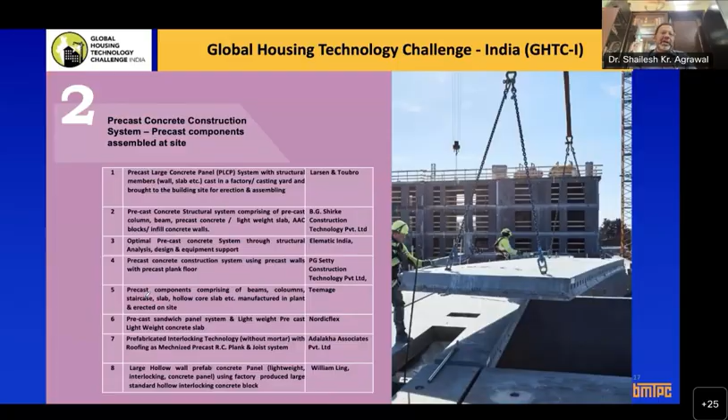Okay, so this is just a slide to show you that these are the 4 companies which were shortlisted under 3D volumetric, then 8 companies under 2D precast concrete construction, then for light gauge and steel 16 companies. All these details are given in that compendium, so you can download that compendium from your dashboard. Then light drywall construction 9 companies, and these are the names. I just explained you all these. Worldhaus, remember, Bhargav, Rising Japan, Bau Panel, Beardshell, Covestro.

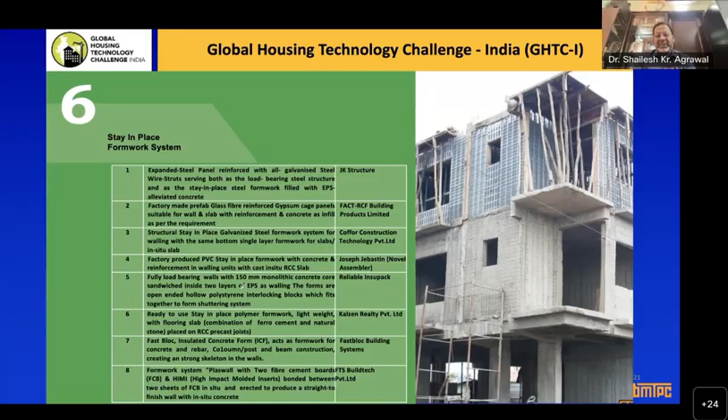Yes, all these companies. Then for formwork system, these are the companies which were shortlisted. Outinord is the tunnel formwork company from Switzerland and French technology, and they are the ones who are doing that Rajkot project. Then stay in place formwork, again 8 companies. You remember I gave you Coffor, Novel Assembler, Reliable Insupack, Kalzen. So these are the companies who were shortlisted, and we are doing this Novel Assembler project in Lucknow.

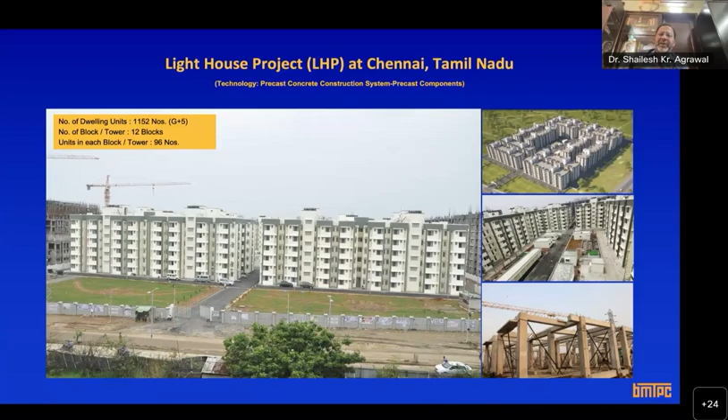Okay, I think I have a slide for each lighthouse project. I'll show you. Yes, so this is the Chennai project. So you see, it's a 6-story structure, 1152 houses are being made. This project was done by Shirke. So they set up a plant just around 800 meters away from the site. At the casting yard, they made all elements, beam, column, all these elements were made, then transported to the site, and they created this structure. This is already over and inaugurated. You can see here. So these are the stages.

This is a manufacturing plant where you have molds and then casting yard, pressurized casting yard, where you can do the fast curing. Then these components are made and then transported to the site and erected at the site. You can erect these components, then you can place the slab, and then you do the in situ concrete to create a monolithic concrete action. And then in between, here they have used infill walls. In Delhi, they are using precast shear walls. So instead of infill walls, you can use precast walls as well. So these are the things they have used. Okay, and in between you can put the services.

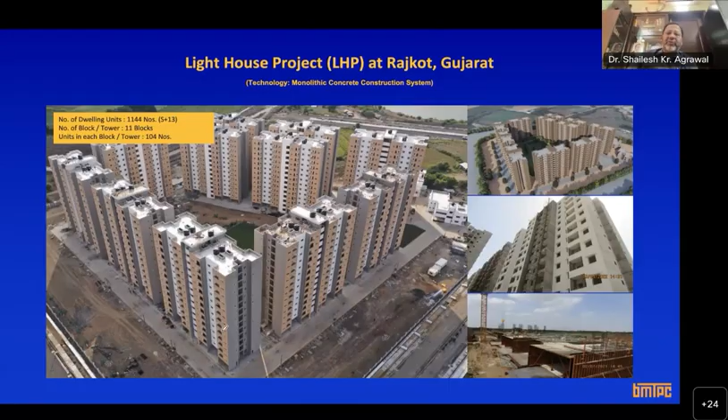Okay, this was Chennai. Then in Rajkot, as I told you, this project is 14-story structure, 11 blocks, and 1144 units. So here we have used this tunnel form. I will show you. Yeah, so this is the tunnel form which is made in the factory, and then brought to the site, and then you create these kinds of tunnels, and then you do the concreting with slab and all these things, and then erect this kind of structure.

So entire one tower was erected in 45 days, and each floor has around 8 units of 30 square meter. Okay, so tunnel formwork from the factory, then these tunnel forms are erected on the already laid reinforcement cage, and then concreting is done, and then tunnel form is removed, and then infill walls of AAC block are done.

Okay. So Indore, again, I explained you prefabricated sandwich panel system we are using. This is that, remember that Rising EPS cement wall panel we are using. So again, this is a high rise structure, S+8, and this wall panel is a non-load bearing wall panel. So we are using steel sections for beam and columns. These are built up sections, pre-engineered steel sections are being used for beam and columns, and then for floors we are using deck slab.

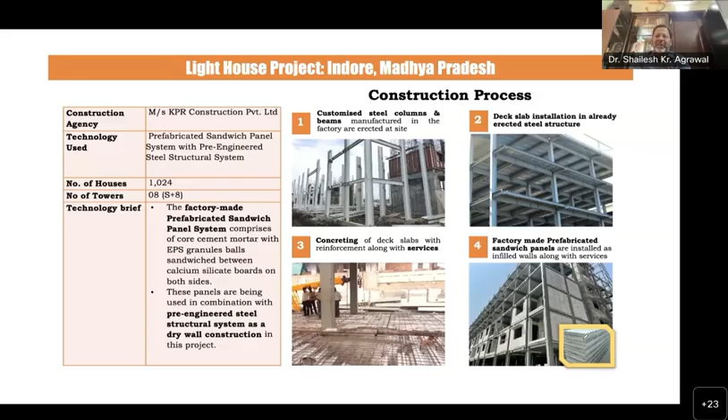So this is a composite slab. You have a profile sheet. Over that you put a nominal reinforcement and do the concrete. You can see here. So concreting is done, and you can put all services. And you can see this white thing. This is that Rising Japan EPS panel, sandwich panel system with calcium silicate board as facing sheets, and in between you have a lightweight aerated concrete.

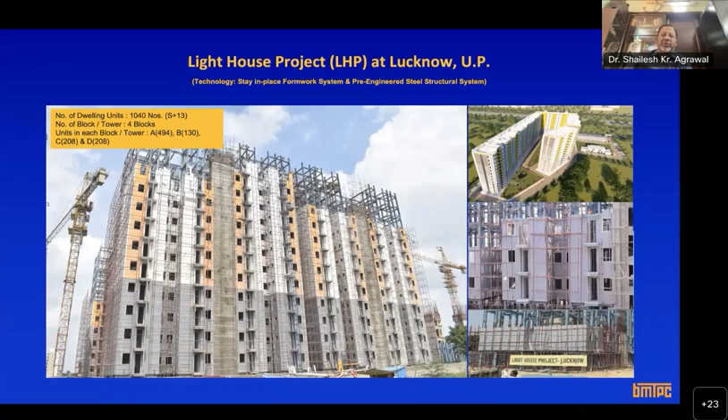Okay, then in Lucknow, this project again is a 14-story structure. So again, same hybrid construction we are using, and here we are using PVC wall forms. Remember, I told you stay in place form, pre-finished walls. So these are those again built up sections of steel beam and column, deck slab, and then these are the pre-finished walls as infill walls, and in between they are filled with concrete. So this is what is being used in Lucknow.

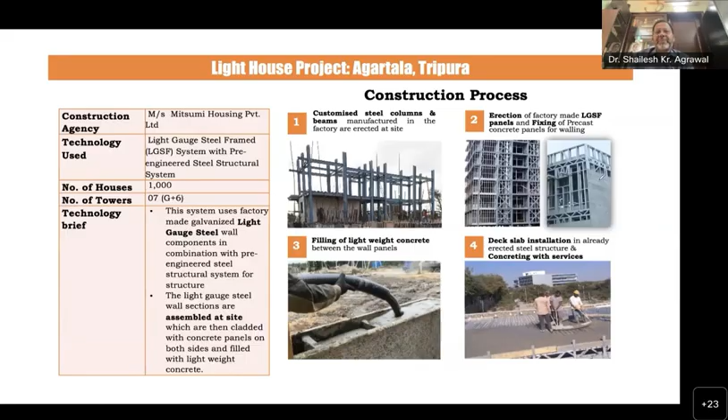Agartala, again, hybrid structure, and these walls are of light gauge steel. I will show you. It is a G+6, 7-story structure. So it's a hybrid construction. Again, steel structure with the deck composite slab, and what you can see here, these are light gauge panels. Wall panels are made with light gauge, and both sides we are putting precast concrete panels, and the cavity is filled with lightweight concrete.

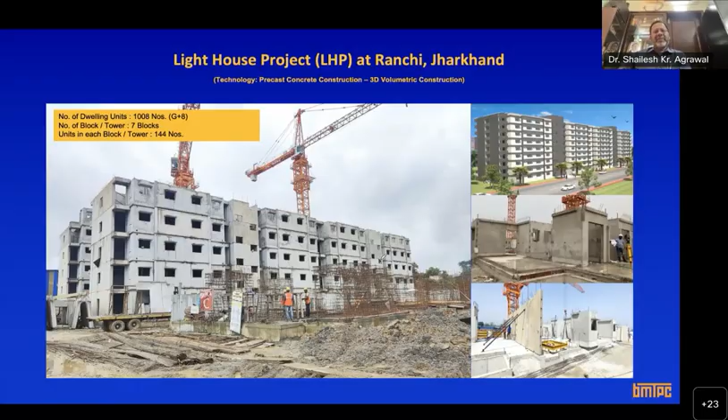And this is Ranchi, a very interesting project. We will have a detailed presentation on this. These modules, I will show you. You can see this is a casting yard, which is made adjacent to the site. In the casting yard, all these modules are being made and then put one over the other to create the entire building. It's a 9-story structure, and most of the blocks have already reached up to 9 stories. So you all can go and visit these projects. So these are the lighthouse projects.

On your dashboard, we have provided a link of Technograhi. You can register yourself free of cost as a Technograhi, and once you become a Technograhi, you can go to the project site and visit these projects. We have also created e-learning modules for Technograhis, created by me, so you will find presentations in my voice on each of these categories, and specifically on the lighthouse projects. There are teams stationed at project sites, so you can go there and spend 1 day, 2 days, or as per your availability, and see those projects yourself.

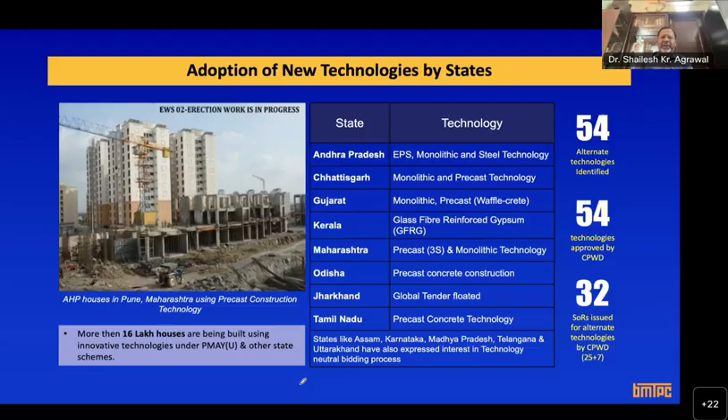Okay, so with this, we come to the end of today's lecture, this 3-hour lecture. Today I have given you a brief overview of what the Ministry of Housing and Urban Affairs, BMTPC, has done. We have created a basket. We have been studying these technologies, and we are trying to promote these technologies through these initiatives.

Also, when GHTC, the Global Housing Technology Challenge, was organized, at that time itself, the Honorable Prime Minister desired that we should at least educate people, educate professionals regarding these technologies, because still people do not know that these technologies exist in our country. So through these courses, we are trying to reach out to all of you professionals, trying to teach you, trying to make you aware about these technologies, so that in your future projects you can use these technologies. Also, you can visit all of these ongoing projects and understand yourself the various intricacies of these technologies.

Also, the agencies who are into these technologies can be reached. You can connect with them; their addresses, their numbers, everything is given in the compendiums. Constantly, we are publishing literature on all these technologies. So you can get access to all these technology providers and start exploring these technologies. Also, we have provided enough literature on your dashboard.